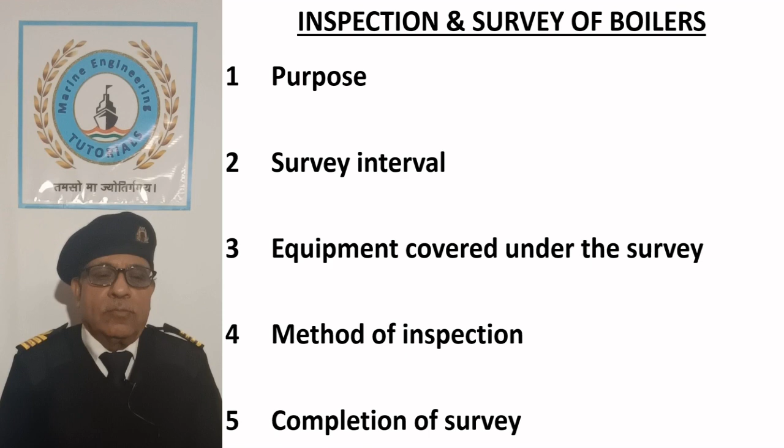Scope of survey for auxiliary boiler. As the boiler on a motor vessel operates continuously, except when oil and exhaust gas boilers are independent of each other, there is rarely an opportunity to open the boiler. Thus, all important checks are carried out during the inspection, and it is made sure that the boiler will work safely without any trouble until the next inspection.

Inspection of internal surfaces. The scope of inspection is to clean the boiler's internal surfaces and to check for corrosion and scale formation in the boiler.

Complete inspection means full internal and external examination of all parts of the boiler and accessories, such as drums, headers, generating and screen tubes, superheater, economizer, air heater and all mountings.

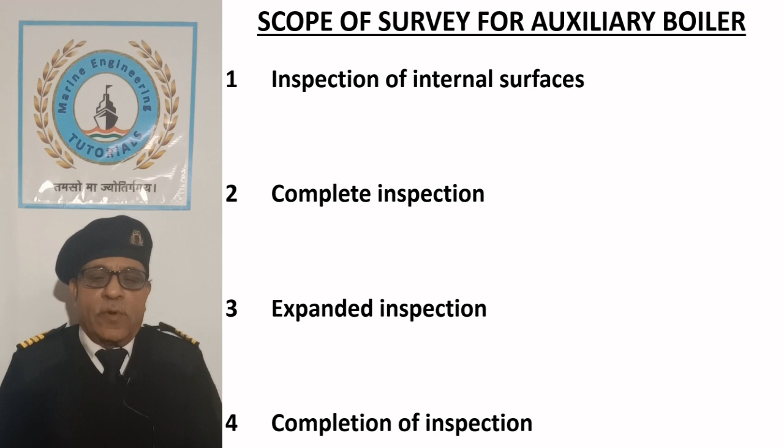Completion of inspection. The inspection is not complete until the boiler has been examined under steam for checking the pressure gauges against a test gauge, testing of water level indicators and protective devices, safety valves adjusted under steam to blow off at required pressures, the oil burning system has been examined, and testing of remote operation for fuel oil shut-off valves.

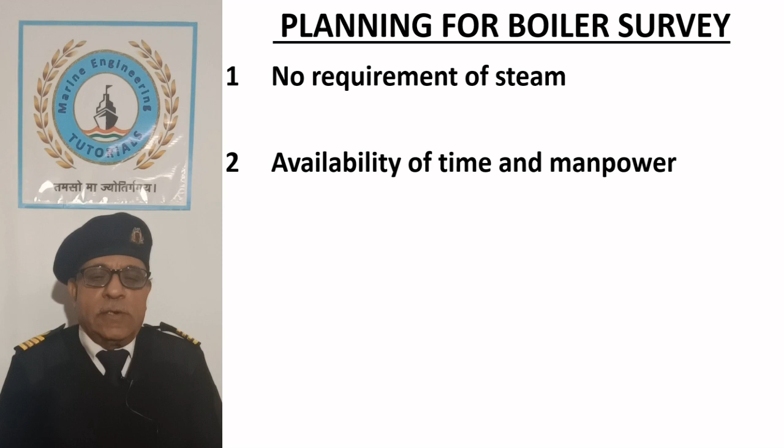Planning for boiler survey. No requirement of steam: confirm that steam will not be required when the boiler is to be opened for the survey. Availability of time and manpower: confirm that time and manpower are available for the job. For this purpose, boiler survey is usually synchronized with dry dock survey.

Availability of spares: check for the required spares, which include manhole door joints, gauge glass, packing and steam joints, which may need to be procured. Availability of tools: check that the tools required, which include gagging tool, torque wrench, rope, chain block, scaffoldings, etc., are available.

Special instructions and past records: check boiler's manual for special instructions and also check past records, which may require close-up inspection of previous repairs. Brief the other engineers about various works involved. Classification society is to be informed about the survey and planned maintenance record. Water testing logs are kept ready for the surveyor's inspection.

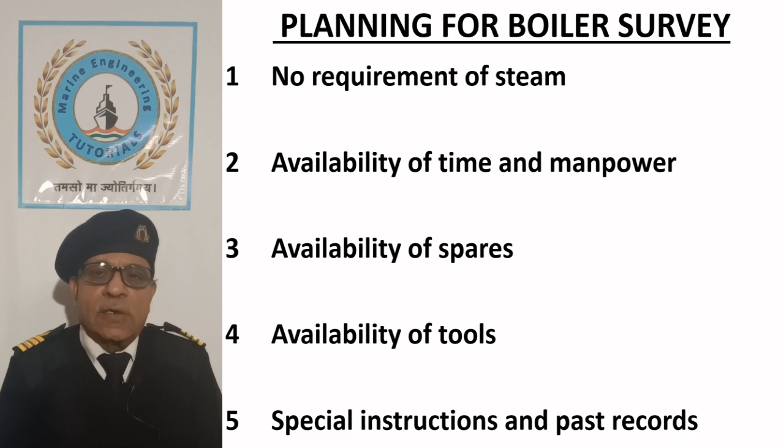Preparing the boiler for inspection. Before inspection is carried out, the boiler should be shut down as per the following procedure.

Information to bridge: as per Chief Engineer's instructions regarding stopping the boiler, the duty engineer informed the duty officer on the bridge.

Changing over machinery to diesel oil. Change over the main engine, generator engine, and boiler from heavy fuel oil to diesel oil so that starting these again does not cause trouble due to solidified heavy fuel oil in the pipelines.

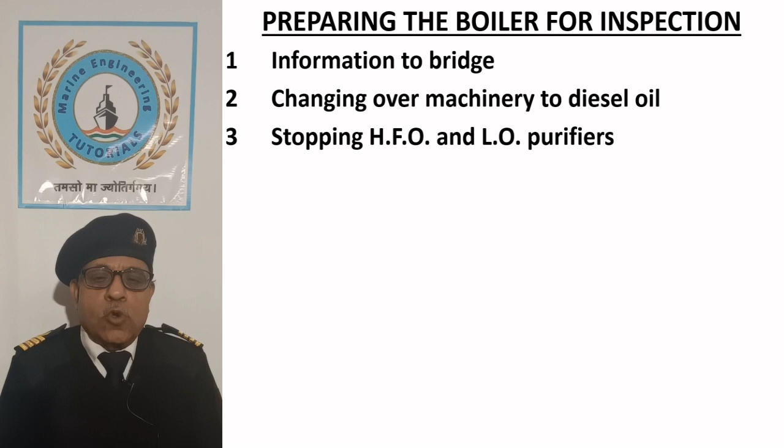Stopping heavy fuel oil and lubricating oil purifiers. Top up the diesel oil service tank. Stop the heavy oil and lubricating oil purifiers.

Stop heating steam. Stop heating steam to all the tanks and tracing steam to all the line heating.

Operate soot blower. Blow the soot before stopping the boiler when it is equipped with soot blowers.

Stop the boiler. Change over from automatic to manual firing mode. Stop the boiler firing and purge the furnace for 3 to 5 minutes.

Switch off the power for the forced draft fan, fuel oil pump, feed pump, and combustion control panel. Hang necessary notices.

Isolate the boiler. Close the main stop valve and shut off the feed water and fuel valves to the boiler.

Cool down the boiler. When boiler pressure is about 2 bar, open the vent to prevent formation of vacuum. Let the boiler cool down and blow down the boiler.

Ventilate the furnace for a period of 12 to 24 hours. Then check for oxygen, flammable vapor, and toxic gases. If it is safe, prepare for entry.

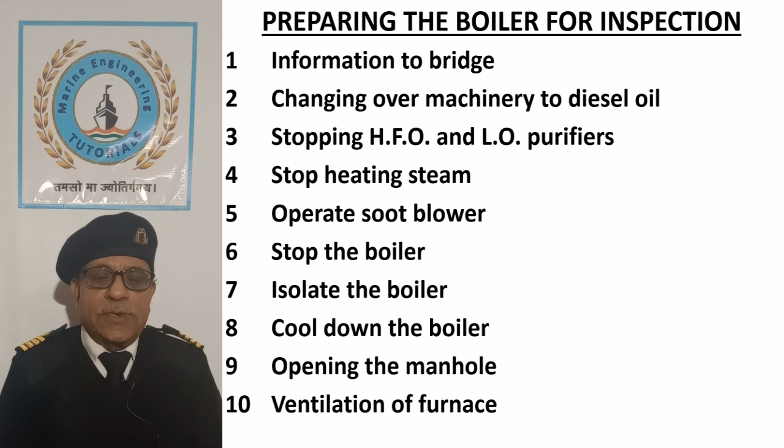Preparation for entry. Observe the following points while making an entry into the boiler for inspection.

Collect required tools. Prepare a long rope, wooden plank, oxygen analyzer, safety hand lamp, and safety torch attached with a rope. Get a pouch to carry tools and keep track of the number of tools brought into the boiler.

Wear personal protective equipment, which may include helmet, safety goggles, safety shoes, hand gloves, etc.

Keep emergency equipment in readiness. Keep a breathing apparatus and resuscitator in readiness. Remain in communication and ensure proper lighting.

Make a safe entry. Check the boiler internals before making an entry, such as foothold and handhold.

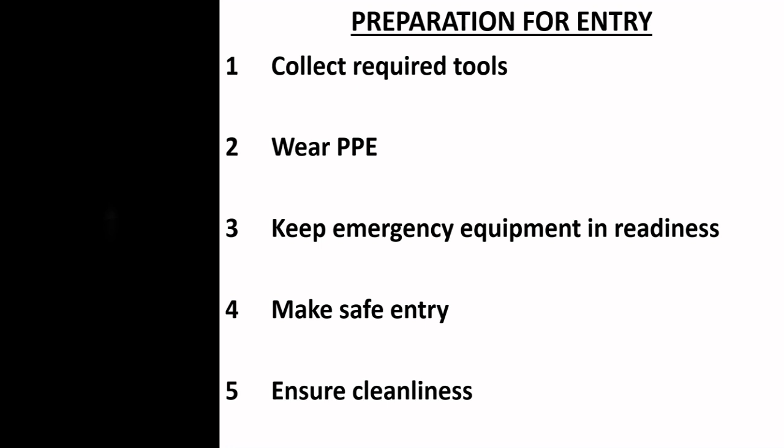Survey procedure for marine boilers. Initial inspection: a visual inspection is made to ascertain the general boiler condition before it is cleaned.

Review of past records. Previous records are examined and notes of previous defects or repairs are taken, for paying special attention during inspection.

Inspection of the pressure part. After cleaning, the steam drum is examined internally and externally together with its mountings. Top headers, economizer, and superheater headers can be inspected before entering the water drum.

Under the boiler, any mountings and supports are examined. The boiler, economizer, and air heaters are examined internally and externally as much as accessible.

Thickness of the plate and tube is to be determined by ultrasonic testing. The pressure part may be subjected to hydrostatic testing when considered necessary.

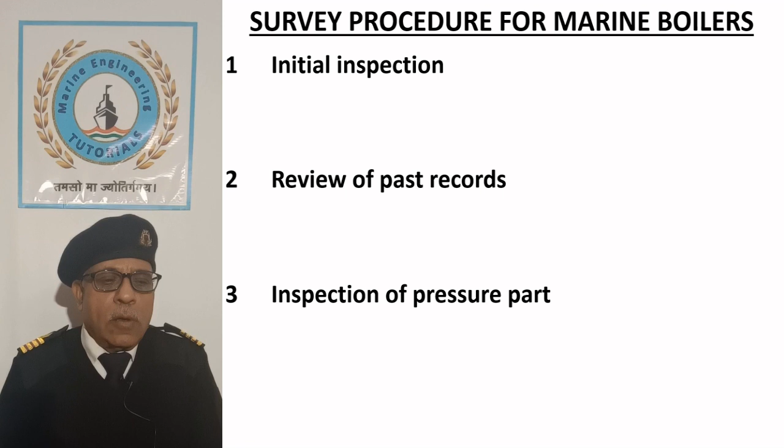Inspection of the gas side. Inspection of the gas side is carried out after closing the water side, in order to prevent entry of grease or dirt into the water space.

On the gas side, the furnace is examined first, which may require erection of staging in case of roof firing. Then the superheater, economizer, and air preheater may be examined. The boiler casing, supports, etc. are examined to ensure they are in good order and allow free expansion.

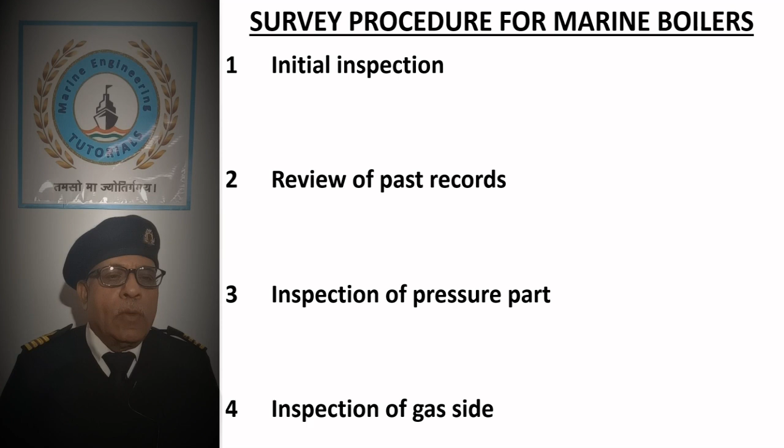Burner, including its carrier and associated pipework, is visually examined. A typical inspection route sketch shows the typical route followed during the survey.

The surveyor may start with external examination of the boiler. The steam drum is then internally examined. Next, the boiler mountings are examined.

The surveyor examines water wall headers and other headers externally. Some plugs and handholes are removed to see the inside condition.

Furnace: the surveyor then enters the furnace to check the condition of the refractory. Water walls are examined for any defects. Before leaving the furnace, the condition of screen tubes is checked.

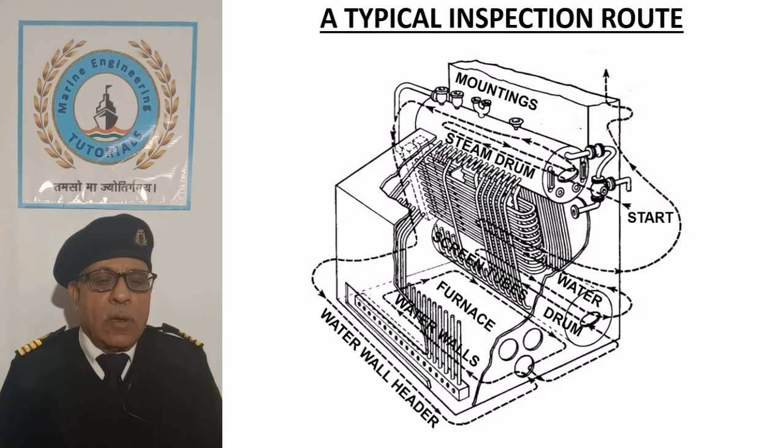The water drum is then inspected for any wastage or sludge accumulation. The superheater is examined for its support. Lastly, the economizer is inspected along with its headers.

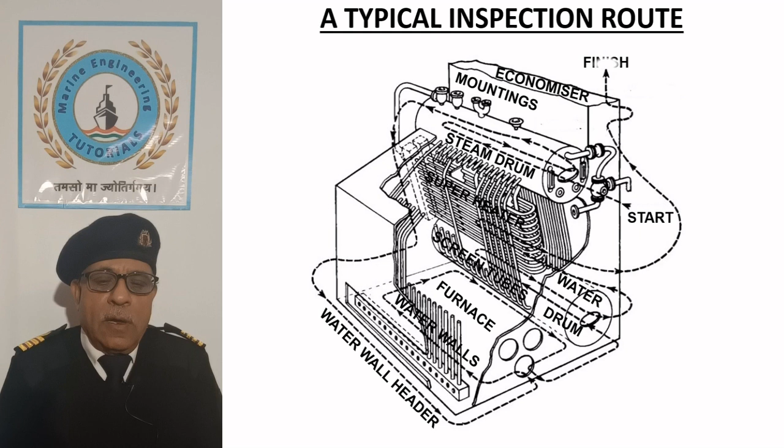This is how the boiler is examined so that no part is missed out. Close-up inspection during boiler survey.

Steam drum: the steam drum is one of the important parts of the boiler which acts as a reservoir for the steam generated and for water required for the boiler. Most of the boiler mountings are equipped on the steam drum, and it should possess sufficient strength to withstand the high temperature and pressure of the steam generated.

Check the steam drum for corrosion, scaling and pitting, manhole seats and surface condition, and the condition of the feed pipe, scum blowdown pan and pipe, and inside parts for choking, security and leakage.

Feed regulators, feed and check valves, water gauge fittings, and safety valves to be examined. Pay attention to the securing arrangement of the valve chest to the drum nozzles.

Generating screen and superheater tubes: while inspecting the generating screen and superheater tubes, check them for corrosion, excessive deposits, flare cracking, and pitting.

Furnace and casing: welded connections from drum to casing are to be checked for any possible damage creating gas leakage. Areas of the drum not protected by tubes should be checked for heat radiation and shielded refractory.

Check for casing defects for possible gas or air leakage. Thermal cracking of the refractory material should also be checked.

Inspection under steaming up: after the inspection, the boiler is closed up, gradually warmed up, steam is raised, and inspection is carried out under steam.

The pressure gauge is checked against a test gauge or got calibrated from the approved workshop. Water level indicators and protective devices, including low water level and flame failure trips, must be tested. Safety valves are adjusted to their correct lifting pressures.

Automatic operation and the fuel oil system are checked under pressure, and the remote operated cutoff gear is tested. This completes the study of boiler survey.